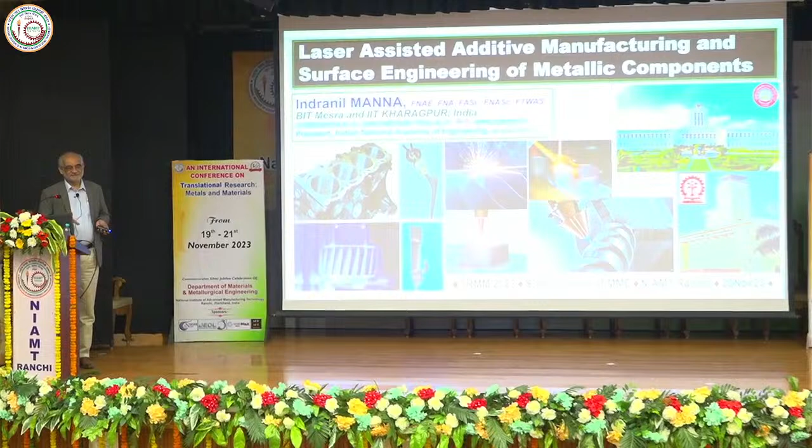Basically, I still wear two or three hats. One of them, of course, is IIT Kharagpur. I still continue my affiliation with IIT Kharagpur, and this is my 38th year. I'm not making a mistake. This is indeed my 38th year in continuation, even though I was in various places in between on leave. Even today, I'm on leave from IIT Kharagpur, and I happen to be heading the Birla Institute of Technology Mesra in the same city. I think most of the students would be able to recognize me.

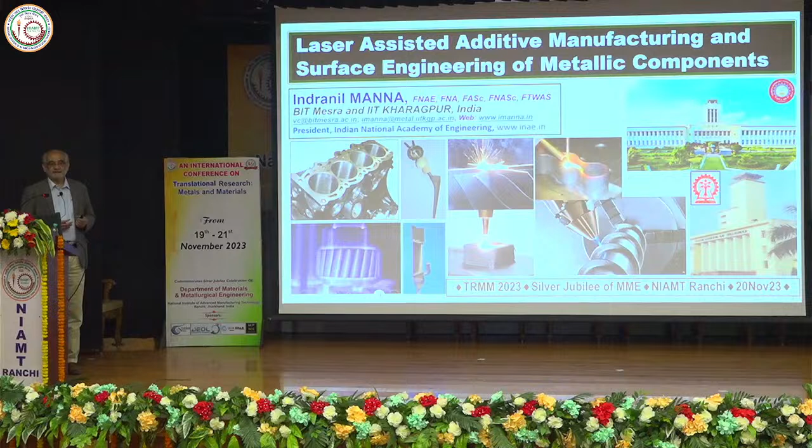And I would like to use this opportunity to talk about the current directions and certainly future possibilities in manufacturing. So plain and simple, the background: in the conventional way of manufacturing, one would expect large volume, large weight, huge floor area, big machines, a lot of manpower engaged in various intermediate steps. You first start with a semi, and you have multiple stages, and when you eventually produce the final 3-dimensional product with the desired specifications, you end up making so much material which is either waste or needs to be recycled.

If you do just the reverse, you start with raw materials and end up with the finished component to the exact specification, and yet produce practically no waste or excess material, that is what is called additive. So you can imagine from this schematic that to produce a finished component of a fixed dimension with a lot of scope for tailoring, if you can do that in one single shot, you obviously save time, money, space, manpower, with advantages which are impossible in the conventional way, which goes through various stages.

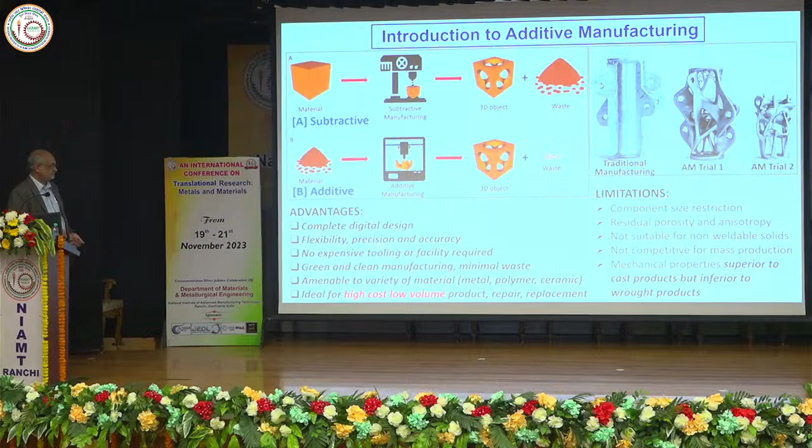So you can make the design entirely digitally. You have a lot more flexibility, precision, accuracy. You don't need all the expensive tooling or intermediate processing facilities.

Far more green and clean in terms of the overall approach. And you actually can literally use all possible engineering solids. You basically can start with a powder or a tape or a wire or a rod. It's not so much successful as yet with ceramics, particularly the oxide ceramics, but it started with polymers, and with metals now it's quite a reality.

The most important fact is mentioned here in red. Additive manufacturing can only compete with conventional manufacturing and score over conventional manufacturing when you're talking about high cost and low volume products. You can't really expect additive manufacturing to compete with a simple nail or a small component, to compete with conventional manufacturing in terms of products which are fairly cheap and very easy to produce.

There are disadvantages as well, and one has to be realistic. The disadvantages mainly come because of the possible defects that we may incur. The whole process is essentially a droplet integration process, whether it's a polymer or a metal. So when you fuse two droplets, and you have multiple of them joining one after another in series, there's every possibility that you also trap porosities, or during shrinkage you may be left with certain shrinkage cavities which may turn out to be internal cracks or defects. So that's one of the major concerns.

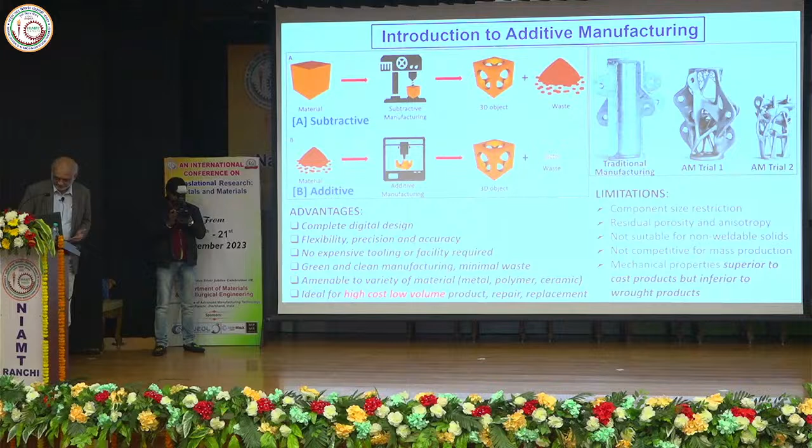So with this, I'll use this one. This is very important, borrowed from internet sources, many of you would have seen it, but two important points to mention here: if you look at the cost per component as a function of the degree of complexity and customization needed. Today you have, for example, 20 millimeter diameter and tomorrow you want 22 millimeter. Or you have a curvature of some few degrees and you want to increase or decrease the curvature. Or you want the sheet thickness to vary from X millimeter to 1.2X millimeter over a certain span.

So all these complexities and customization, if you wish to introduce them in conventional manufacturing, you have to change the mold, you have to change the die, you have to change various tools, and altogether quite a bit of changes would be necessary. In the case of additive manufacturing, the cost per component is independent of the customization or degree of complexity. The second important fact is that whether you produce 10 or 100 or 1,000 or a million, approximately the cost per component would be the same. So that's why you are seeing a horizontal line, a line which is flat.

And so you are seeing, I can't even roll the cursor. This is better? Okay, that's much better.

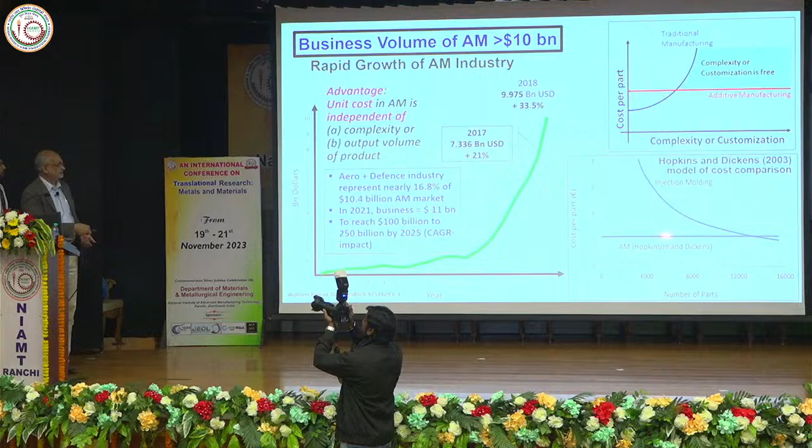So these are the two major advantages, right? And it is because of this reason, this is the growth curve in terms of volume of business done in billions of dollars over a period of time. And you see the history, though it starts from 93, a reasonable amount of work started happening only in this millennium. So I would say that history is about 20 or 30 years, and until about 10 or 15 years ago, the total volume of the business was hardly a couple of million dollars.

And today, this is old, 2018, five years hence we are already somewhere around 20, and the projection is that in just another 5 years it's going to cross $100 billion worldwide. So this exponential growth is enough for any manufacturer, any entrepreneur or investor to give it a serious look and explore whether we can make use of it. So those of you who are in NIAMT associated with manufacturing, I'm sure all of you would find it very interesting to realize that the future of manufacturing possibly will be in this.

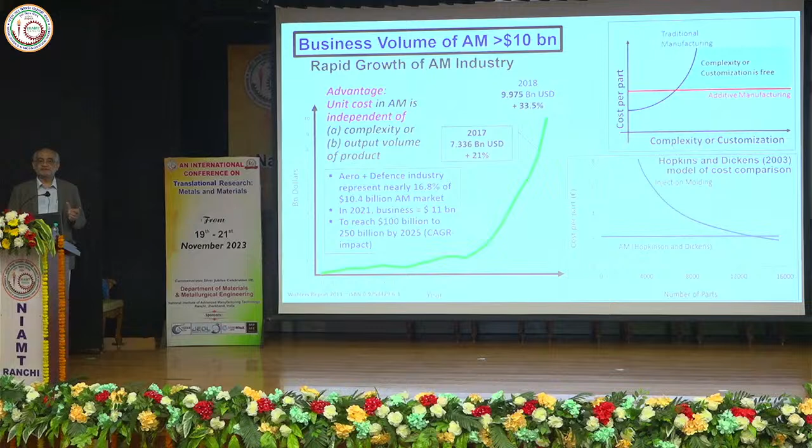And it's not just the savings accrued from raw material, it's about flexibility and unexplored possibility, which should be the main reason why additive manufacturing is going to be the future direction of manufacturing. So already there are examples like Daimler or BMW, even Airbus, all these big giants who produce millions of components, and for a single product like an aircraft will easily have a few tens of thousands of small components.

Now, if you have to maintain a warehouse for, let's say, just a passenger bus, the total number of spares that you need to have in the store would easily be a few tens of thousands. Huge space, huge logistic challenges, and if the bus fails in Ranchi and you have to bring it from Mumbai, then there's a lot of

time delay and transportation cost involved. Whereas if you have, let's say, 10 such additive manufacturing centers, the moment a component fails, the order is placed, you possibly can produce and see the replacement in a matter of hours, if not, it can be fairly quick, much quicker.

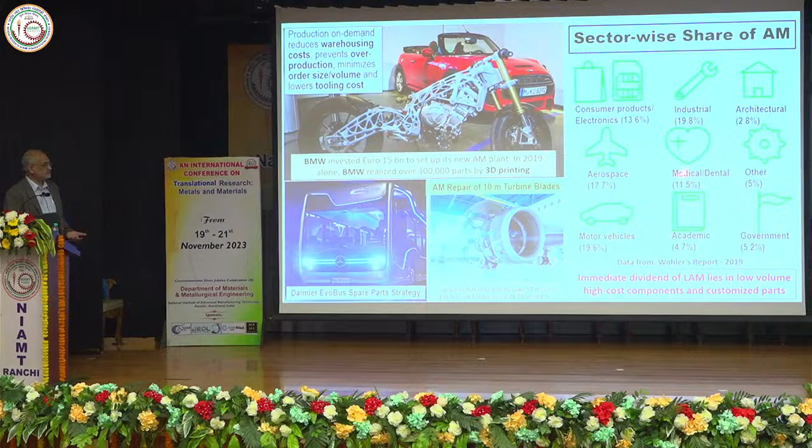If you look at the overall sector-wise share, then industrial production and manufacturing areas, aerospace industry, automobile, motor vehicle industry, account for nearly 60% of the total volume of business.

But what is coming up also is that conventional sectors which nobody ever believed would be useful for additive manufacturing, like the construction industry. Today, big buildings are actually constructed in a matter of days, certainly not months, let alone years, just because of precast structures which are produced on site and assembled.

Similarly, biomedical is another area where a lot of customized components are needed. For example, even if two persons are of the same height and the same weight, there's no necessity that the bones and various other anatomical structures will be exactly of the same dimension. So when a surgeon wants to replace or add on something, customization becomes a necessity, and that is fairly easy through the additive route rather than through the conventional route. So that's also one area where nobody would mind paying an extra amount of money when it concerns replacement of a heart valve or a very important joint and so on.

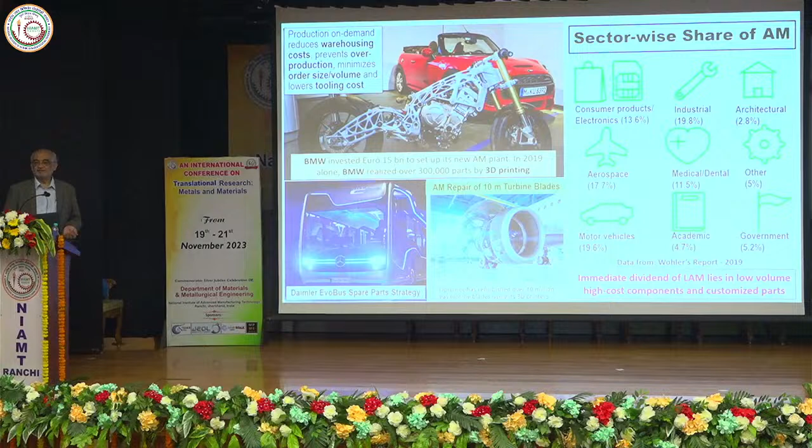There is no necessity that one has to do it purely with only one single tool, but the tool that I am personally devoted to is laser, and there's a very obvious reason as to why we consider laser to be a very important tool for additive manufacturing - it's coherent both spatially and temporally.

So there's no divergence, it runs in a straight line, you know exactly where you are going to make it hit and produce the heat, and also in the course of time, there is no variation if you can maintain the intensity constant. It's monochromatic, so you know exactly what the wavelength is. As a result, it's very easy to compute the amount of heat delivery at the given point of irradiation, area of irradiation.

I already mentioned low divergence, and this is what attracts the manufacturing industry the most - high power density. So literally anything from a very low melting thermoplastic polymer all the way to diamond or even tungsten or high melting solids, be it metals or ceramics, independent of the bonding characteristics, can be melted, evaporated, or fused.

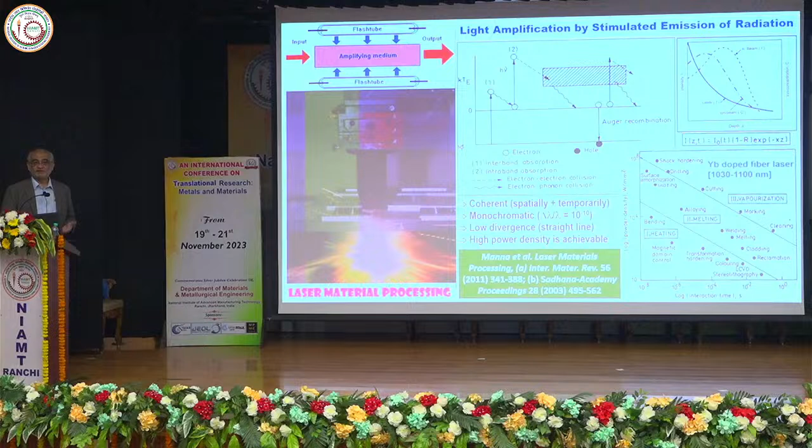In case of metal, I have an overlapping band, so essentially electrons are already available on the conduction band. I simply energize them. So in case of metal, the heating is faster, but at the same time, the reflection also is more. I have to know this basic physics so that I can deal with the solids and then impart exactly the amount of heat I want, to take it to the required state - solid state heating, or melting followed by solidification, or evaporation followed by deposition.

I'm sure as students of NIFFT you are all quite aware of these kinds of possibilities. So these are the conventional processes. I use the word equilibrium because the microstructural evolution in all these cases is time dependent. If you allow more time, you actually come closer to the equilibrium microstructure, be it melting, casting, heat treatment, sintering, rolling, or extrusion.

So in all these cases, we are talking about mass production. They are relatively slow, based on certain machine tools, and the microstructure or the outcome, the properties, are more or less predictable. I know what is, for example, the tensile strength, to what extent I can go. If I want to break away from that, and produce something which doesn't exist today...

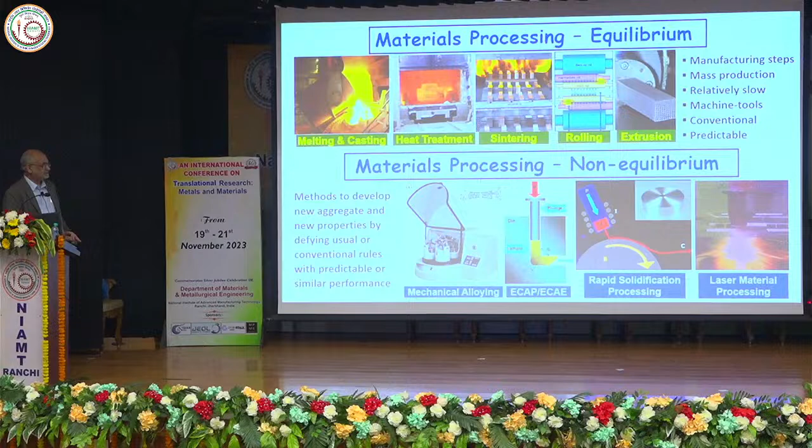...then I'll resort to so-called non-equilibrium processing. That means I'll break away from the Gibbs rule and try to enter into a regime where I can produce an aggregate which is not predicted by the phase diagrams. So in that case, I can resort to one of these techniques, and this is the technique we are concentrating on - laser material processing.

So while dealing with materials, I have a source of heating and I have material. As I said, I can have any of these three fundamental materials - polymers, metals, and ceramics. I can use any one of them, and imagine I'm using maybe not necessarily a single component, because you never use pure material for production - you always use alloys or various mixtures.

Then I'm bound by two constraints whenever talking about conventional processing. One is the thermodynamic constraint - if this is a binary diagram of A-B, I can pack only a maximum amount of B in A, and a maximum amount of A in B. This is the solubility limit. It's almost like call it God-gifted or nature-gifted - you can't defy it so long as you equilibrate at this temperature.

Also, you can't ignore the fact that if you have a liquid of any composition throughout, you can have 1% B in A or 99% B in A - nobody stops you, because in liquid you have complete solubility. But as soon as you cross this horizontal line, which is an invariant transformation line, there's no other way than to allow two solids forming simultaneously - you call it eutectic transformation. So these are the restrictions or ordains of nature which you cannot defy altogether.

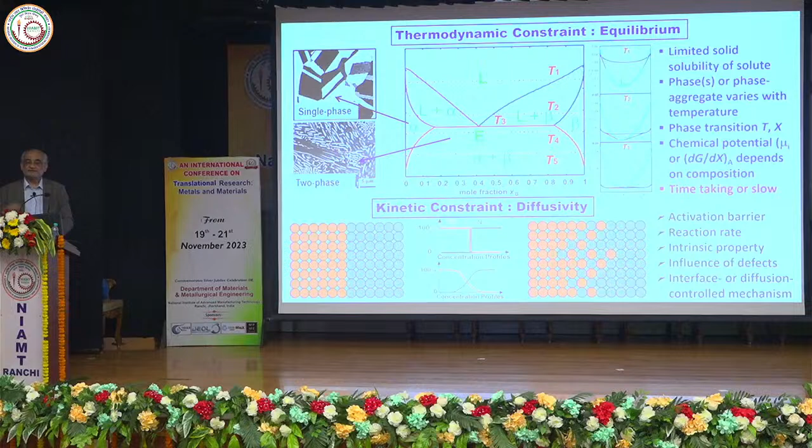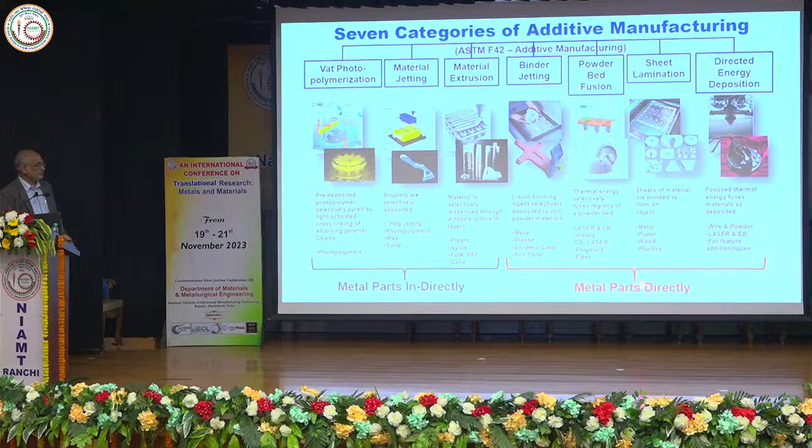But on the other hand, you can also do direct manufacturing of components using one of these techniques, shown on the right side of the view screen—from binder jetting to, I would rather say, powder bed fusion and so on. But let me simplify by saying that for the time being, if you're interested in metals, there are two ways to do additive manufacturing.

One is the so-called fusion bed, or fixed bed, or powder bed technique. So I have a bed of powder, and I have a source of heat—let's say that source is a very small line or spot. The moment it moves over or hits a point, it immediately melts and fuses, and then the beam moves. By the time the beam moves out, the previous point has already solidified. So I'll have droplets, or small fusion regions, moving linearly in one direction, then in the perpendicular direction, and when I complete the entire X and Y over a given area, I have a sheet. When I start building vertically, I have a three-dimensional component.

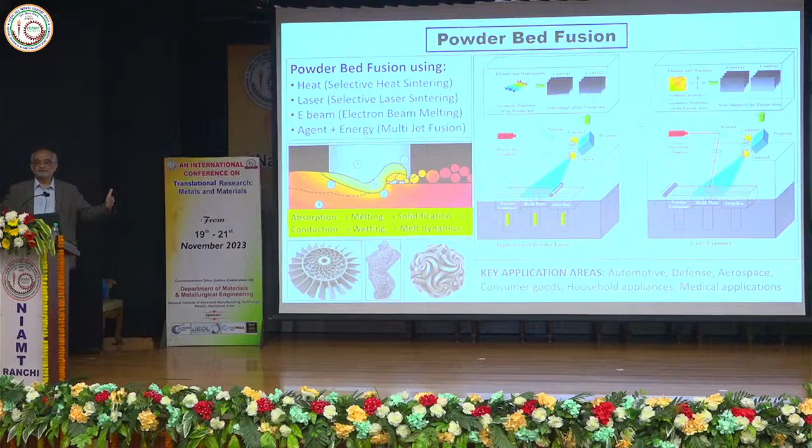That's the idea. The biggest disadvantage of this technique is—well, it's very good, and it's actually adopted and routinely practiced in industry for components where you don't want to change the composition. That means you know one gear very well, of a given dimension or changing dimension, but the composition is fixed. So you have a huge powder bed, and you use that tank of powder to manufacture the component.

But on the other hand, if you have the attitude of exploring something different and something new, you might like to change the composition, change the dimension, or vary things along the time you are feeding the powder. There I'll have a different configuration—instead of a tank of powder, I'll have a nozzle, which is essentially a coaxial nozzle.

Through this central region, the laser beam comes through, either fed by some reflection method or directly by a fiber, and these nozzles feed the powders directly into the spot. This is where the trick lies: I can have multiple feeder nozzles feeding not necessarily the same powder, but different powders. Even during feeding, I can keep changing the proportion of A, B, C, so I can vary the composition. Even in the simplest case, when feeding the same stainless steel from four different nozzles, I have to make sure the point where the powders converge coincides exactly with the laser spot—there should be total coincidence of the laser beam and the powder feeding point.

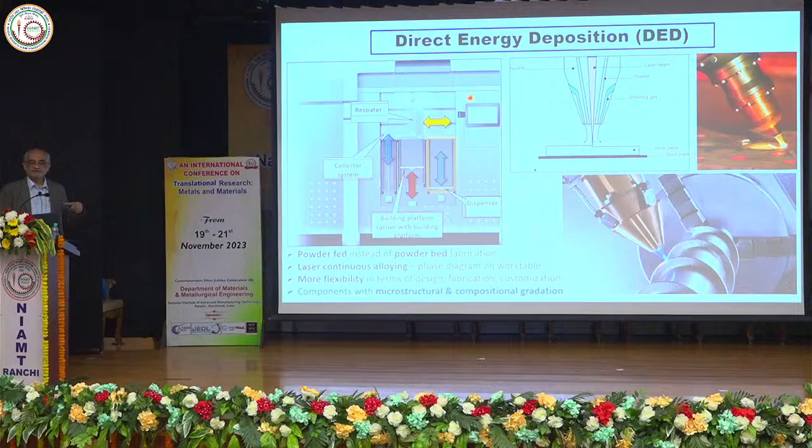So then I move along this line—by the time the beam has moved to this part, the previous part is already solid. I'll finish this part, then move one step ahead vertically, and keep moving along X, along Y, and then along Z. That's how I produce a three-dimensional component. It can be a simple block like this, a circular tube, an inclined tube, a nozzle with a conical shape, or a very complex design. Anything is possible. Here you have more flexibility in changing the composition or dimension than you have in the powder bed system.

And since I didn't have a lab of my own, that made me go all over the places, literally all over the places, every single country, and fairly renowned laboratories in Germany, England, in US. I would have had some collaboration and would have guided some projects as students together. But in 2018, I got a very large grant from DST, thanks to them, about 6.5 crore.

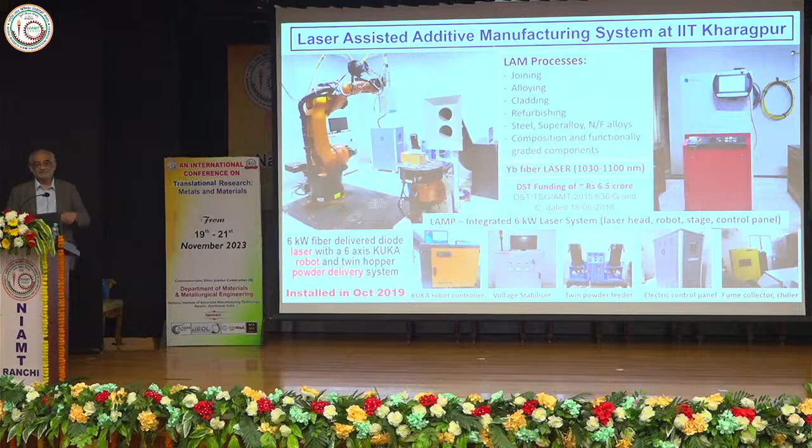So now on to some results.

Partha, you have to tell me about the time in case I overshoot. It's up to you. Okay, then I have the freedom. That's the advantage of having a director of the institute as a former student.

So this is the monster that all engineers would like to do something with someday, somewhere, so that one can claim that I have developed a turbine blade or a disc or something to do with a coating. One of the finest examples of engineering in my own understanding, because these blades are actually an 8 to 10 component system, single phase, and more than that, single crystal. Those who study metallurgy would know what a monstrous job that is, to retain all of them in single solid solution and develop only as a single crystal, one single orientation.

But they are exposed to 1050 or above temperature, so they are prone to high temperature oxidation, creep, and several other thermal fatigue damages. So there's always research happening to improve further, because if you can rotate at higher speed and withstand higher temperature, your thrust to fuel ratio increases, and instead of 10 hours, you can fly continuously for maybe 20 hours or so. So obviously that's a big difference.

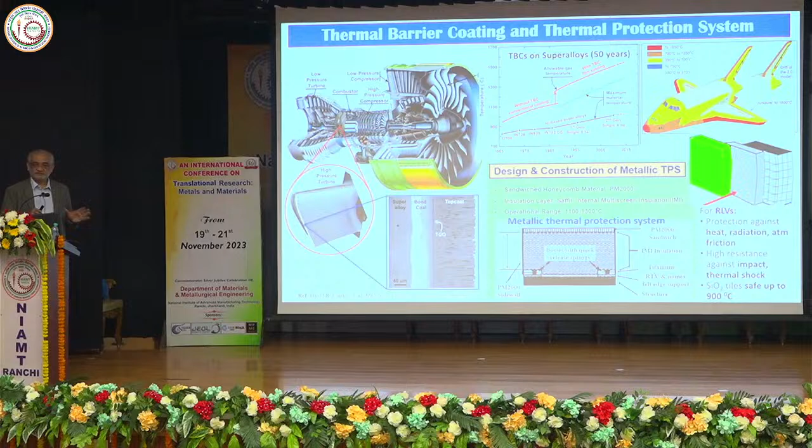So instead, if you can gradually build, so you have 100% metal, finally 100% ceramic, and in between you keep varying every 10%, every 20%, the coefficient of thermal expansion mismatch will be minimized, and as a result, you can get both. You can have a metallic structure for toughness and fabricability and thermal protection from the ceramic.

So one of my students, Manoj Kumar, we had funding from ISRO, and all he could develop so far was such a layered structure, varied structure. So this is completely ceramics. You do have porosities, but we don't mind having porosities because air is a poor conductor, so that also helps in reducing heat transmission across the cross section.

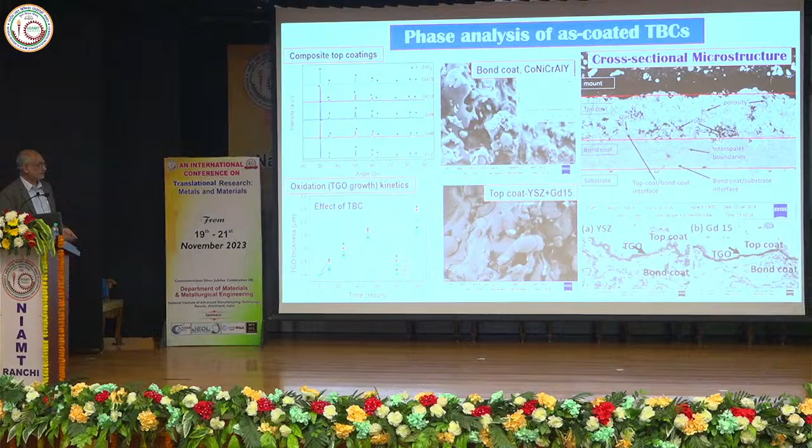This is how you actually measure the kinetics of the oxidation. Oxides won't oxidize, but at this interface you have the transversely growing oxides. So if you look at their growth rate, that gives you an idea as to which way the interlayer is oxidizing. So I'll skip those details, but now is actually the novelty that we wanted to propose. So this was done more than 20 years ago.

And this was one of the two PhDs of Jyotsna, who first showed that people always think of oxides as thermal protection. I think this was one of the first few examples where she showed that if you have intermetallic phases, if you look at this phase diagram, look at this Ti5Si3, 2130 degree congruent melting maximum. There's no fixed melting temperature because this is over a particular composition range, but this congruent melting maximum is 2130, but that's only the temperature.

The most important thing is that until room temperature, it's a single phase. So there is no phase transition. If you have anywhere else, there will be a phase transition, and hence there will be differential changes in volumes and expansion, contraction, and so on.

So what she did was to pick up a composition in the hypoeutectic zone, but because of faster cooling, these liquidus curves actually plunge, and as a result, she ended up getting a hypereutectic microstructure in a hypoeutectic composition because of non-equilibrium cooling. What is the advantage? The advantage is nearly 85% of this microstructure is covered by a phase which has a very high melting temperature, very low coefficient of thermal expansion, and most importantly is much stabler and more oxidation resistant than, leave alone metals, even many of the oxides.

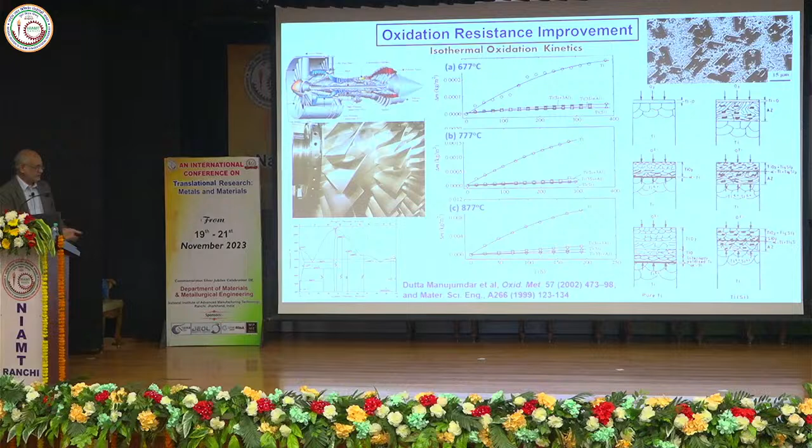So this was a very successful attempt, and learning from that, we propose that on superalloy 718, we can have silicon, aluminium, these kinds of elements. When they are alloyed, then I can have a graded microstructure which will be intermittently silicide or aluminide on the top, but at the bottom I can have superalloy.

So what I'm trying to say is that if you want to deposit or make a thermal barrier coating with zirconia or alumina or whatever, you first need a layer in between, like a NiCrAlY or any of those multi-component cobalt alloys, which will form a bond coating or bond layer between the base substrate and the top oxide layer. Here you don't need that.

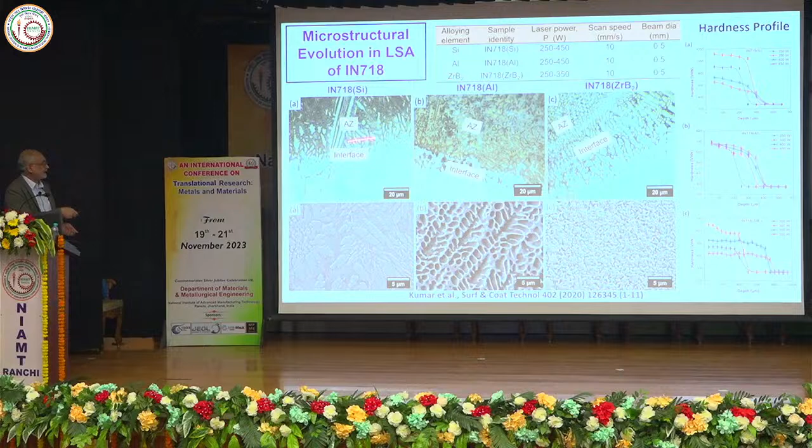Here you start with the superalloy, and then you gradually change the composition and end up getting a top layer which could be 80-90% of an intermetallic phase, not a monolithic coating, but dispersed phases, which is even better in terms of coherence. What is even more significant here is this interface. You see, this is completely superalloy, and this is where you're gradually changing. They grow epitaxially, near epitaxially, with a certain direction. And most important, there's no crack. There's absolutely no decohesion, because you're starting with a metal and gradually changing your composition and making it intermetallic.

So these are the descriptions of what is there at the interface, how they oxidize, and which way they are better. Just one graph here. This is base 718, and this is with one of these coatings. So obviously the mass gain per unit time is much lower. That means the oxidation kinetics is retarded significantly.

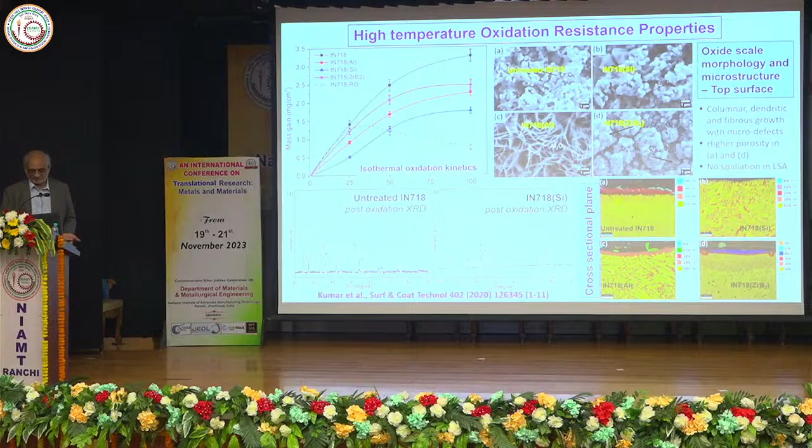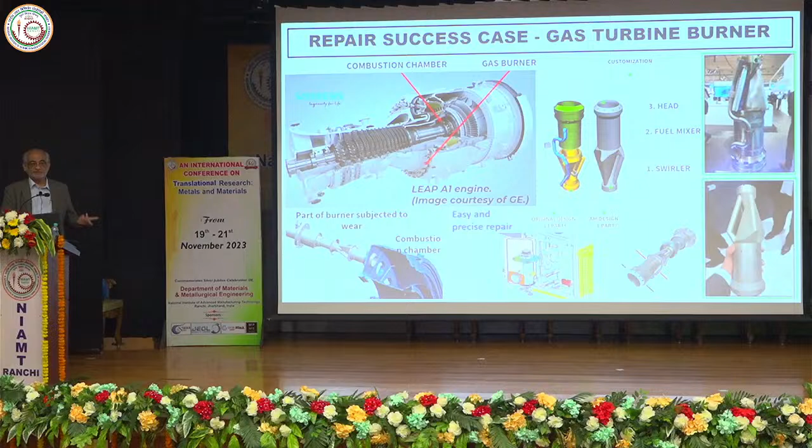Similarly, very important components like this. So here also, at this nozzle, the very design of the nozzle, if it is assembled, there are 13 different parts put into a single nozzle assembly. If you can design the same thing by additive manufacturing, then it's a single component, single part, in one single manufacturing operation. So you can very well imagine how advantageous and attractive that is.

So in order to do this, of course, I do not have the capability of attempting to create a nozzle, but I'm going to show now 4 examples from 4 of the students. All are from Pune, all of them work for Hoganas, and all of them are interested in developing components by additive manufacturing, either for refurbishing or for direct manufacturing.

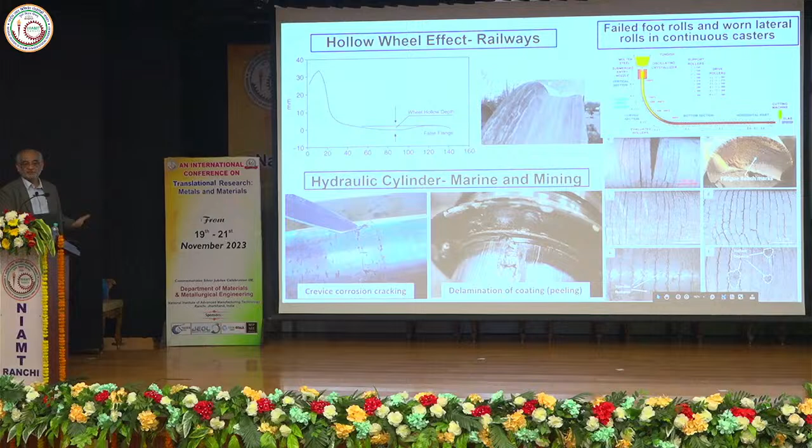So Nikita wants to basically come up with cladding or coating and eventually a complete roll by which she can replace some of these worn out ones, either refurbish them or develop graded rolls of various diameters. And she basically, okay, no, I haven't come to that as yet.

So before that, this was another student. He's now not a full big shot, but half big shot in ARCI Hyderabad, leading the CLP and the laser unit there. And he was one of the first few to show something very interesting metallurgically. So he deposited H13, one of the standard grades of tool steel, on H13.

Now normally in H13 rolls or buckets or something, you would use a stellite coating, cobalt tungsten carbide combination. So obviously 2 different compositions, the interface is suspect, and most importantly, the temperatures are different, as a result of which you refurbish, but that repaired component also doesn't last too long.

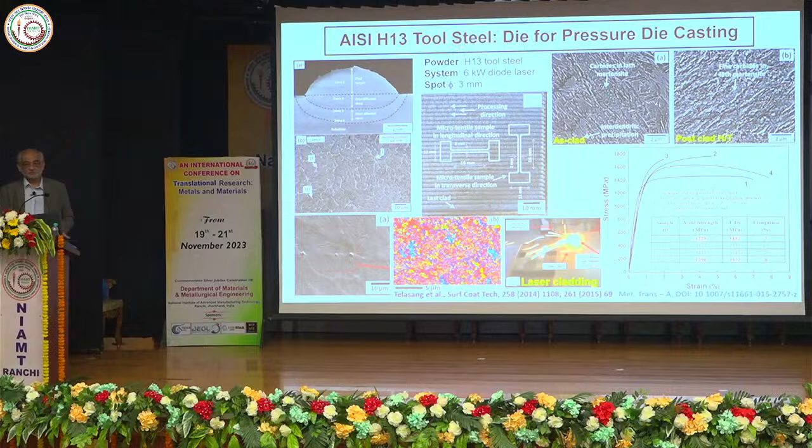So the martensitic needles are actually very fine, but confined within the prior austenitic grains, and because of the fine platelet size, not only does the strength increase, with little retained austenite in between, his overall fabricability range also improves. So it turns out that actually the top layer mechanically is even better than the virgin roll. So this gives a very interesting, exciting possibility.

So then, borrowing from this, we said, why not take stainless steel and end up with a superalloy? Not necessarily a turbine blade, but there are many components, let's say a heat exchanger. So if I have a stainless steel tube, and then I make a clad with superalloy with a sharp interface, stainless steel to superalloy, the interface is amenable to cracking because of compositional mismatch.

How about doing it in some graded composition, 25%, 50%, 75%, and then I have complete superalloy. Okay, so that's the idea, and this is in progress. We certainly see that cladding is easy. Apart from porosity, there are no quench cracks.

These are the phase aggregates. We tend to avoid intermetallic phases in large volume fraction, but not altogether. So there are niobides formed, and that's a matter of worry: if you have too high a volume fraction of these niobides, or maybe even some Laves phases, then this could lead to brittleness, which we have to avoid.

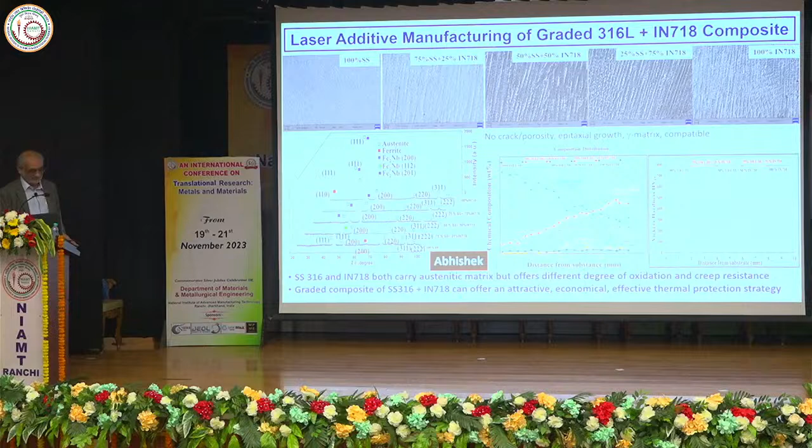So this is what Abhishek wants to do and is doing that. The next one is just an anecdotal observation. Forget about all these parts. Sandblasting, belt grinding. You know very well that metals actually reflect more than 90% of the laser incident light because of the free electron cloud available on the surface. That's not good news because you are giving, let's say, a few kilowatts, but only 10% of that can get coupled with the stock, which is all wastage. So you would like to improve the absorptivity of the laser.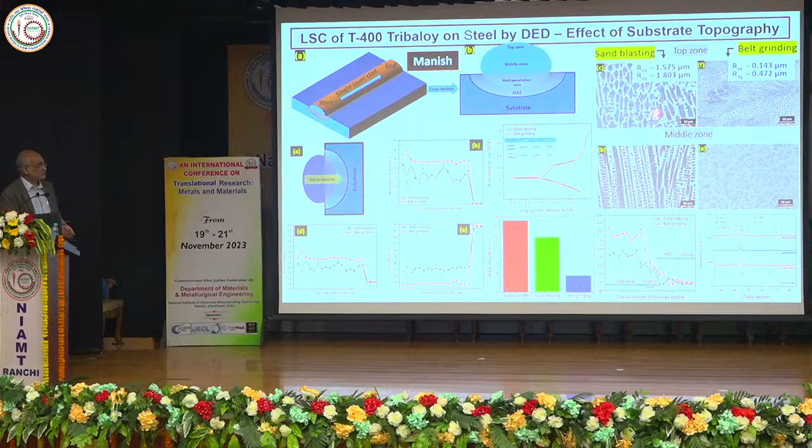The standard industrial way is surface roughening. So you do it by sandblasting, and accidentally we said, why don't we also try with belt grinding? And now whether it is sandblasting or belt grinding, a blind man can see the difference in the microstructure. So just because the surface preparation method adopted was different, the entire microstructure could also be so much different. So that taught us one lesson, that we all tend to worry only about the laser, the power density, the speed, the composition of the powder, ignoring altogether the surface condition of the stock on which we are cladding or depositing. So that also has a very large bearing.

So this is a similar exercise with pure stainless steel. Just to tell you this part, these are orientation imaging maps. So you're seeing that from the top surface you see large areas, but these color codes are only to give you an impression that if you look at the length scale, you're talking about almost a few tens of micrometers of areas with no grain boundary in between. Or even if there's a boundary, that boundary is almost negligible or can be ignored. The reason is the mismatch is so little. So in other words, laser gives us an example. So this is the top surface. When you look from the bottom, then you see directional growth.

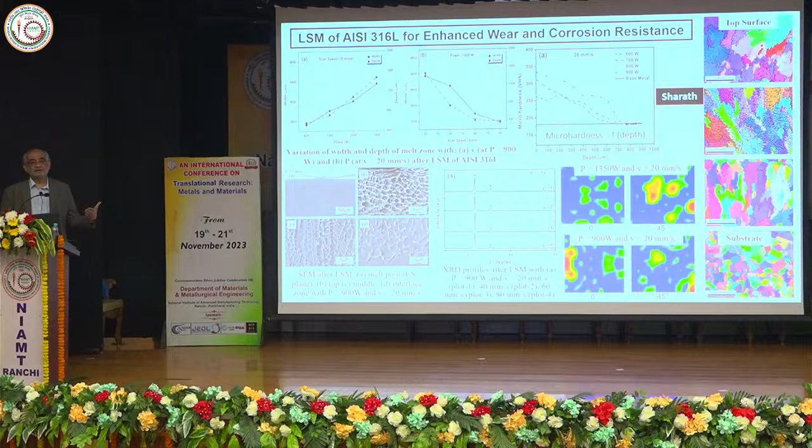Okay, but when they grow onto the top surface, they're not immediately providing you high angle boundaries with large mismatch, which is good news because if there's a large mismatch, then there's also a large difference in electrochemical potential. Stainless steel is meant for corrosion resistance. So if you create a top surface where the boundaries are less than a degree or just about a degree, then formation of galvanic cells is minimized. So the corrosion damage also will be minimized.

So this is what I was trying to refer to earlier on with Nikita's work. These caster rolls, she wants to try with these compositions. I'll just fast track it. She's trying to understand how the microstructure develops along the thickness. So this is A, the top layer. So this is one of these alloys. In fact, this is a martensitic brand from the Höganäs group. This is high nickel, so this is austenitic, and this is also a semi-martensitic variety. So she wants to try with different ones.

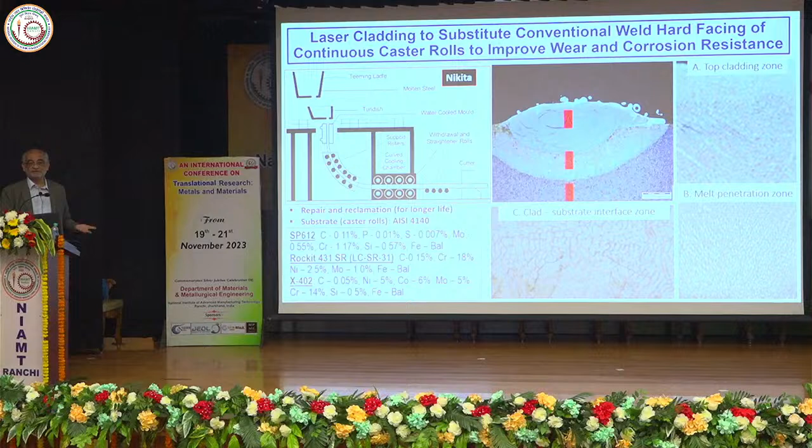The base substrate is 4140, low alloy steel. So imagine if, instead of a high alloy steel, you can change all these casters to low alloy steel and then clad it with one of these clads, and still retain or even offer better corrosion resistance, better high temperature resistance, then the company stands to gain a lot. So that's the idea.

Similar efforts are done by Mangesh, and he wants to take care of wheels, the railway wheels and pulley wheels and so on, where cracks and erosion or wear on the surface are very common, and he wants to prevent that by having a harder coating. So this is just a signature in terms of hardness variation, and one can make it sharp, or one can also make it shallow, graded.

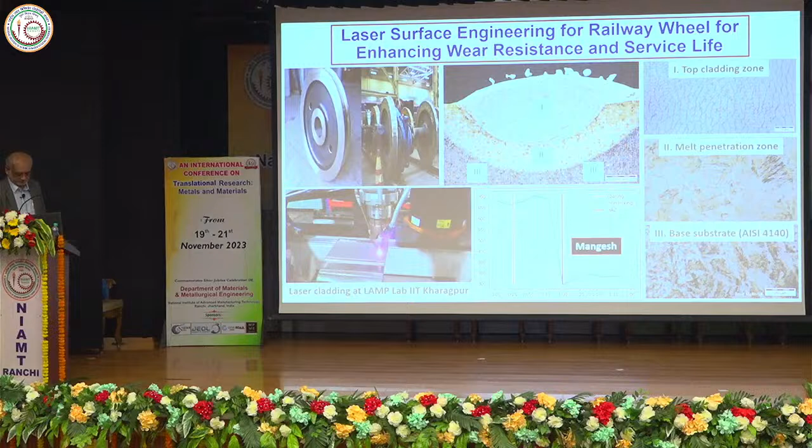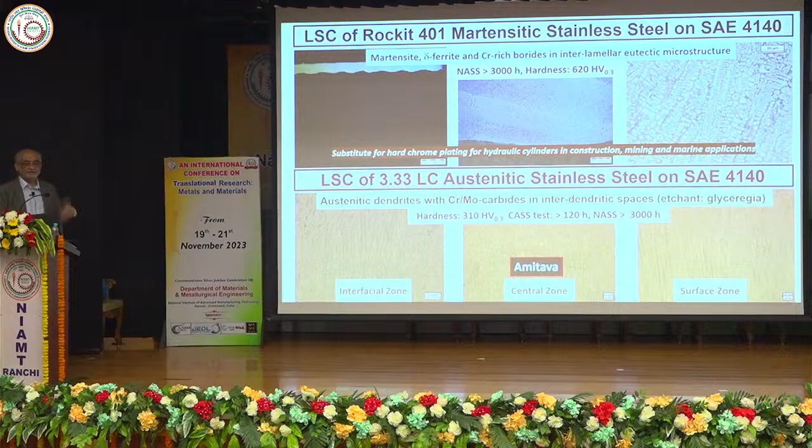This is what Amitava Roy is trying to do, and his work is related, again, to two varieties, austenitic and martensitic. He wants to develop austenitic dendrites with carbides in between, in the interdendritic spaces. So essentially use 4140 as a base and develop either a martensitic or austenitic variety on the surface, so that they can be used in conditions where the threats from wear and erosion are much larger.

And then finally, for earth moving equipment, Shubhranshu wants to develop a similar thing, but this is new: he wants to not only use one of these high alloy steel clads, but also disperse tungsten carbide into them. Now this is different from the stellite kind of cobalt-based tungsten carbide dispersion in terms of coherence or compatibility. And you have very nice spherical objects.

So this sphericity also tells us that there is very little dissolution during the process itself. So they remain solid particles and they can be dispersed. The advantage here is that if you want to disperse tungsten carbide in normal metallic systems, there will be a lot of gravity segregation. With these thin clads, you can actually maintain very good uniform distribution.

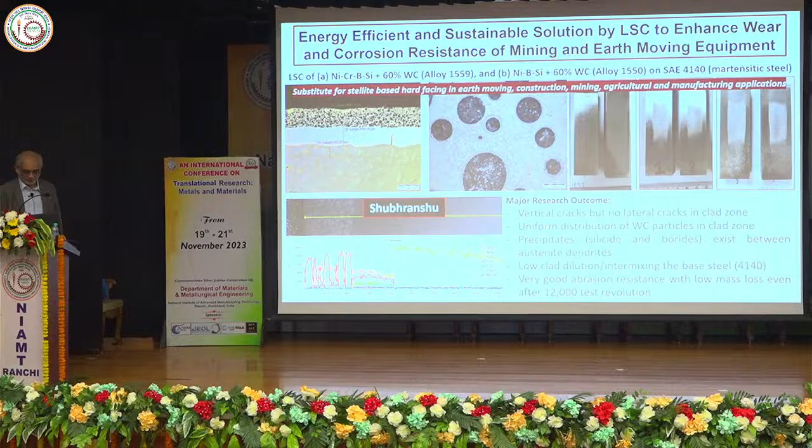So this is the last example I want to share. Essentially, Shubhra Kamal wants to develop these three-dimensional components using T800. This is again a trade name of this same Laves phase dispersed high temperature clads. And so he's trying to build large thickness and large height components and then look at their variations.

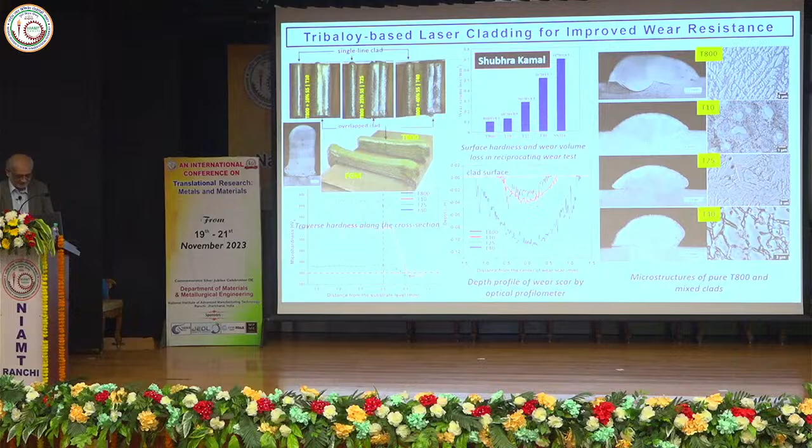So in order to do that, he's again using compositional gradation. So 30, 25, 10 means different levels of dilution, and this is as-received T800. So he's mixing T800 with stainless steel and forming different clads. The interesting part here is, if you look at these blue ones and the red ones, the red lines show the wear resistance and the blue lines show the hardness. So you can very well imagine that the harder the surface, the degree of wearing is minimal.

So obviously when you have pure stainless steel, like here, you have fairly high wear volume, the red line, because the surface hardness is small. But of course, please remember that hardness is not one and the same as wear resistance. But nevertheless, Archard's law tells us there is a direct correlation. So what he is trying to show is that if I can grade appropriately, then I can change the hardness and the wear resistance accordingly.

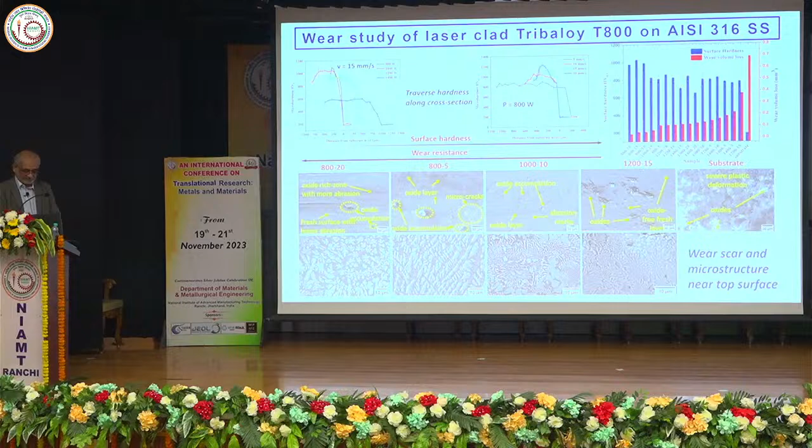And in order to do that, you develop such various types of microstructure. You can very well see that the nature of the microstructure is different, the constituents are different. And so one actually can do a complete mapping. We know solidification behavior in large volume is primarily controlled by two independent parameters, the thermal gradient and the growth rate. So if I plot them, even in laser processing, which is a small volume and a very transient phenomenon, one can show such microstructural mapping.

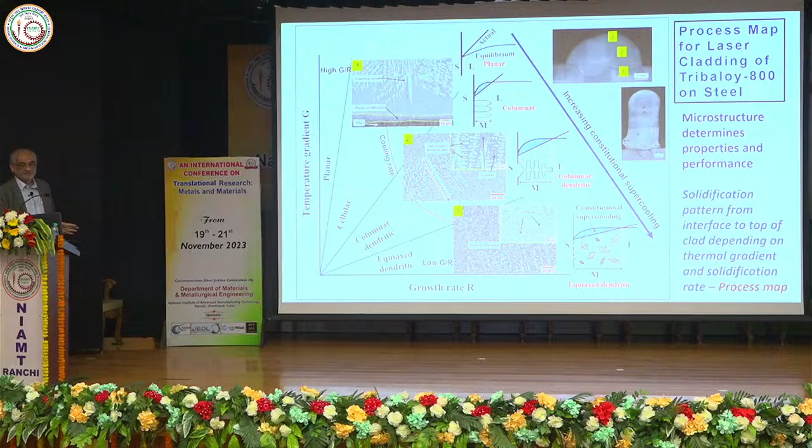When you have very high temperature gradient and so very high G over R ratio, then you end up getting such directional structures. Whereas when you have very low G by R ratio, you can gradually change from columnar all the way to equiaxed regions. So that means this microstructural control is also possible.

So I think now I can wind up and make certain important statements. I firmly believe that additive manufacturing, particularly with the fusion method, say with laser, is a droplet integration process. You can produce one, two, or three-dimensional components. You can produce a wire, rod, a sheet, or a three-dimensional component. There's a huge growth potential, which we are appreciating gradually, and the field is far from being saturated.

There's enough good news for the PhD students. You can do a lot of very exciting work and produce good papers. There's a lot of metallurgical aspects to be understood. For any conventional component, we have several decades, if not a century, of documentation. I know exactly what is the creep level, fatigue level, strength level, and how it would behave under these conditions.

Additive manufacturing components are just hitting the market, so we don't really know how they will behave after 5 or 10 years. So there's a lot of modeling and experimental work to be done, for example in terms of fatigue, creep, reliability, failure modes, and so on. So we need a lot of good manpower, and the PhD students can do wonders there. I personally see huge opportunity; a lot of hurdles exist which we have to understand, and for that we need a very serious effort.

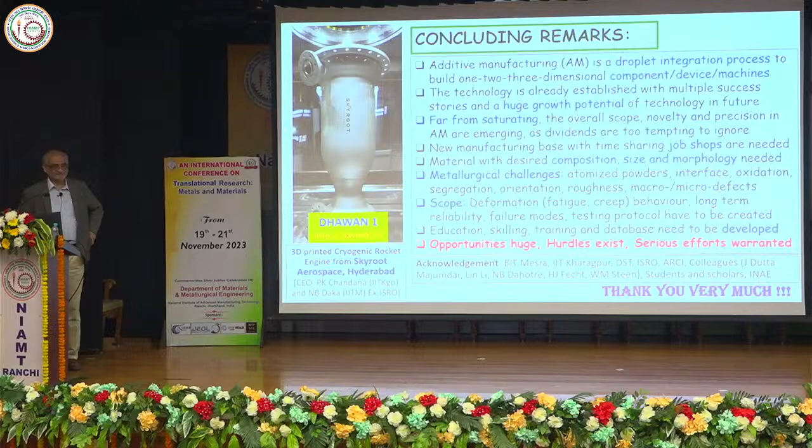Is there any question from anyone? Yes, Prof. Thank you, I learned a lot.

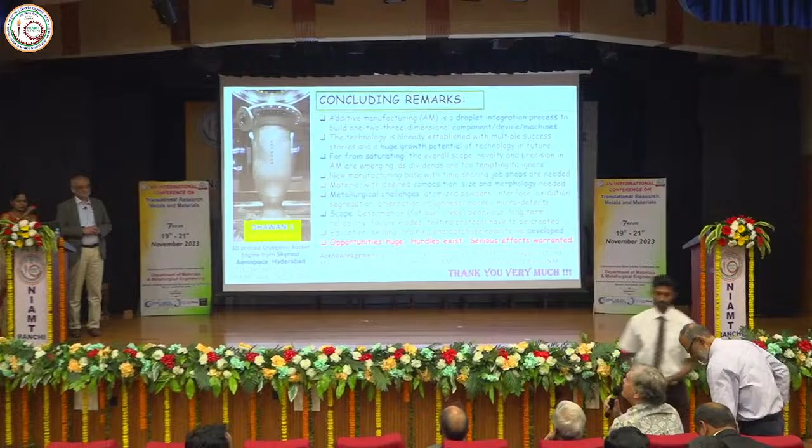I was curious about one plot where you showed the cost per AM part staying horizontal. But how is that possible? Because it takes more time or more machines? No, this is the advantage.

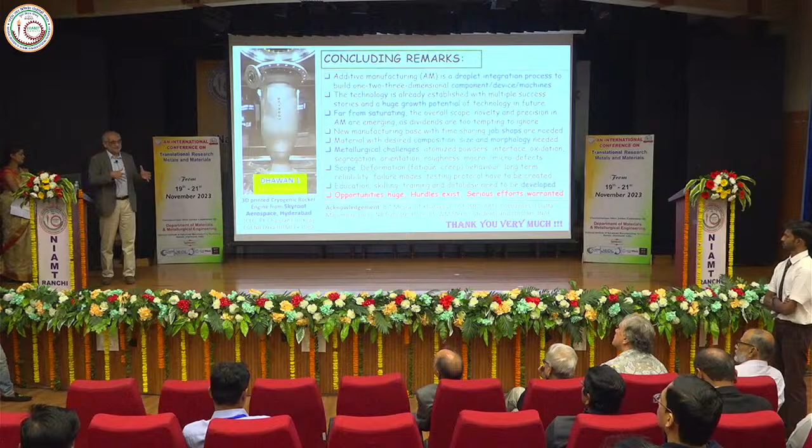Your design philosophy, whatever you develop in your CAD file, all flexibilities you can do in your CAD file. So today you have a dimension, let's say XYZ. Tomorrow you want X, 0.9X, 1.1Y or something like that. Your design board develops that and trains the laser beam to move exactly to that direction. So if I move from one design to another, in case of conventional processes, you need to change the die, you need to change the various other things needed. But if you make the same part, I thought this was about the same part.

Oh, if you make the same part, then conventional manufacturing is profitable if you produce more than a certain number. Yeah, exactly. So in fact, that's what I showed. If I may just quickly go to that.

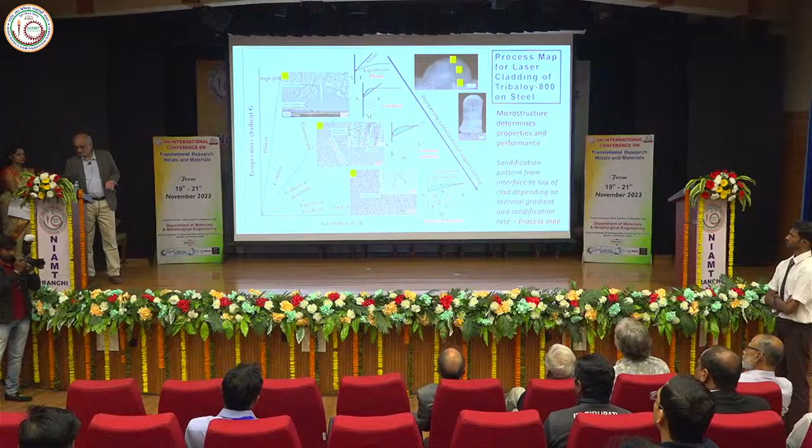Otherwise, your additive manufacturing - if you produce, for example, one heart valve, or one femur joint, or one gear of a very specific design - for conventional manufacturing, that's a very huge investment. For additive manufacturing, it's no cost at all. That's the advantage. Similarly, if you now do the tailorability, like I was saying, that you want to adapt to a particular design, change according to thickness, along the thickness or the dimension, it's a lot easier here.

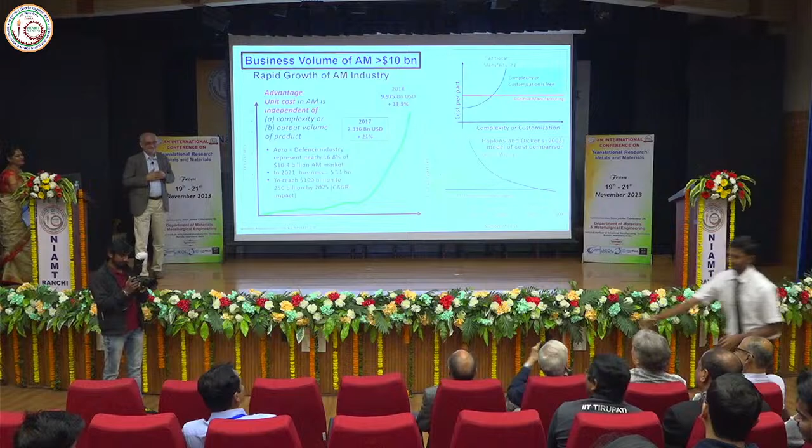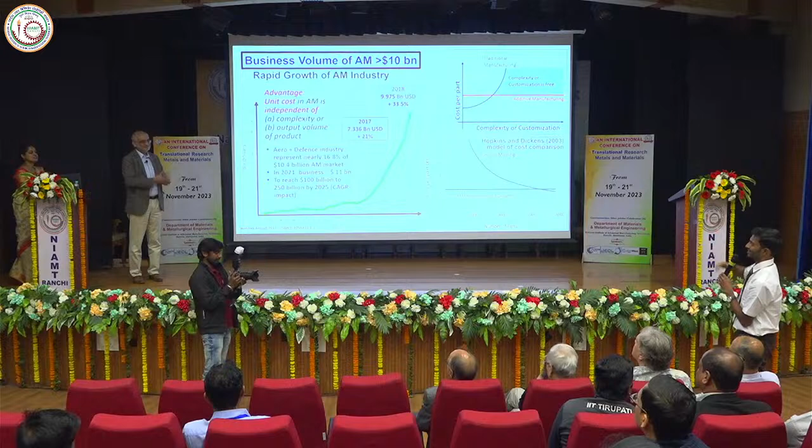Sir, I have a doubt. Sir, in Inconel 718, IN 718, which we use for the space researchers, mostly the superalloys - so you have made a layer of silicon or aluminum, the silicon layer. What kind of bond does it make with the austenitic alloy? Because the austenitic alloy which we are using will withstand till 1200 or 1300 temperature. It's an FCC, whereas the other one is diamond cubic. So how do they talk to each other? That's yes, the question, yeah.

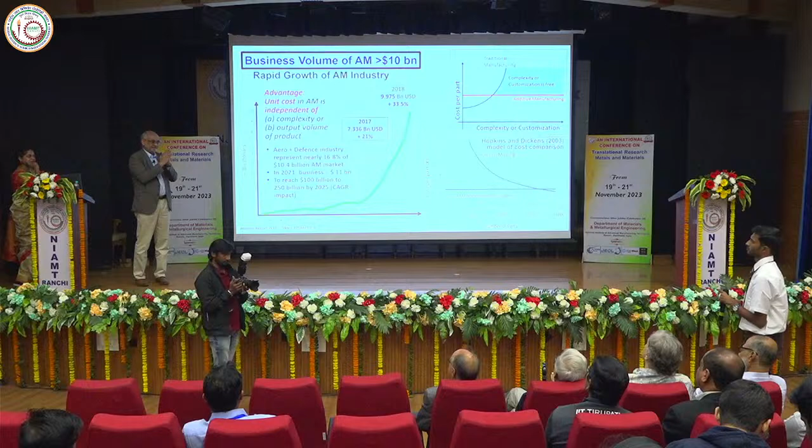So the trick is, I said silicon added, I didn't say silicon clad. So I'm adding some percentage of silicon so that I'm following a phase diagram and then stopping somewhere. And by stopping, what I mean is that it will give me the desired volume fraction of that silicide phase which I want. So I have to select my parameters such that my composition will give me exactly X volume percent of silicides dispersed in the austenitic matrix, which is IN 718.

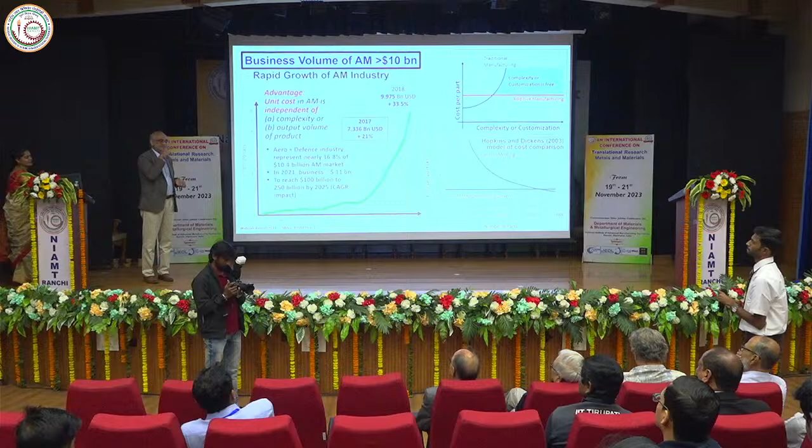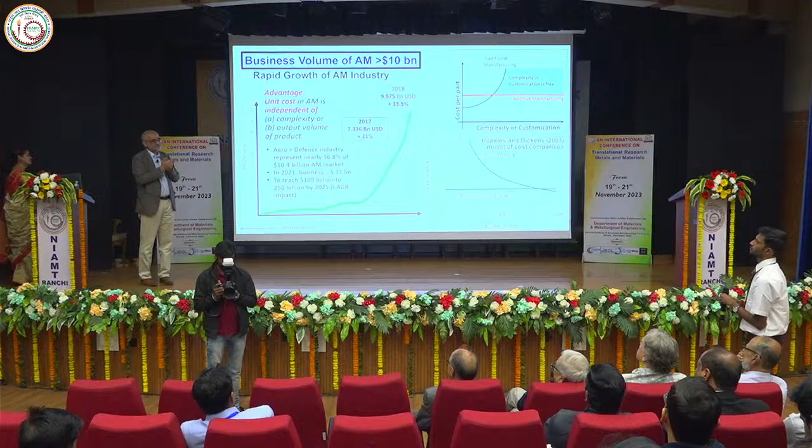But I wouldn't do that often with superalloy, because the advantage of superalloy is elsewhere - its own creep properties, right? So this is only when I'm interested in improving the oxidation resistance. By the way, that example I showed was on titanium, not on superalloy.

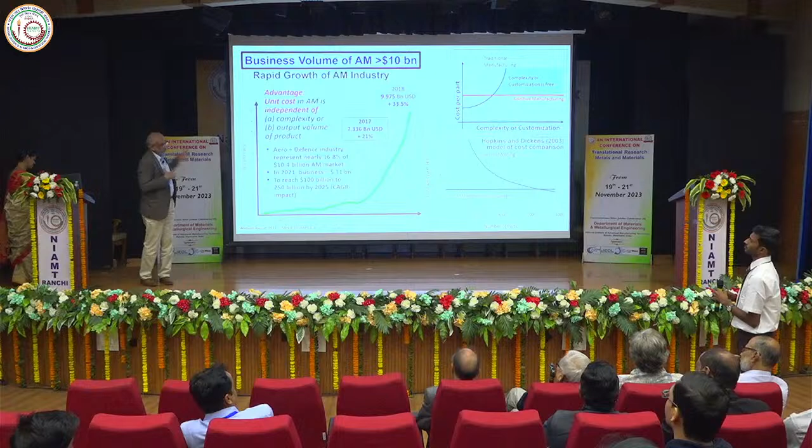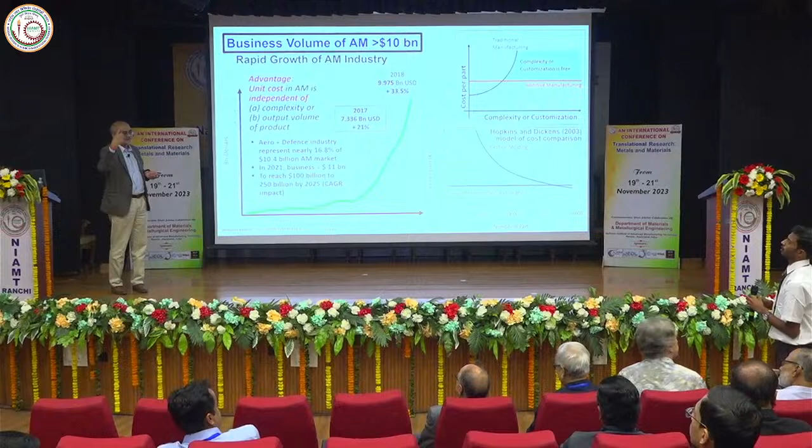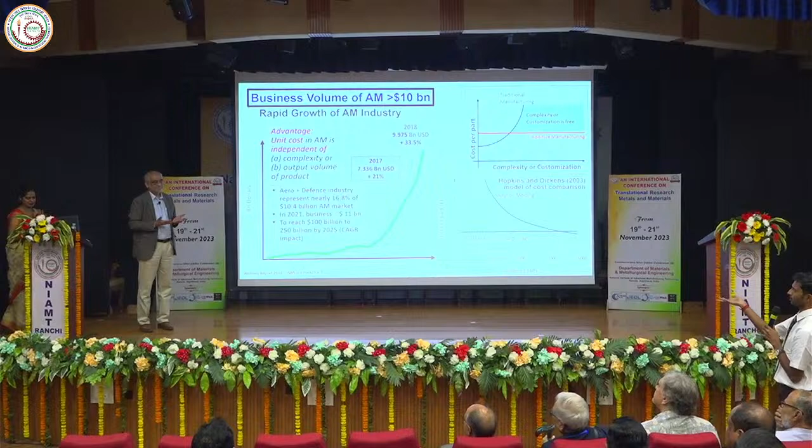So on the titanium alloy, which is in not the combustion but the compressor part, there you reach let's say 500, not even 350, 400 degrees centigrade. So if I can push more air, the frictional forces will be larger, frictional heat generation will be larger. So I need a thin layer of silicides there, which can take me to 650 degrees centigrade. So it's only a thin layer where I have silicides dispersed, not a monolithic layer - because titanium alloys, basically Ti 31 or titanium alloys, cannot withstand more than 500. I mean, typically in the compressor part, the highest temperature is about 350 to 400 degrees centigrade.

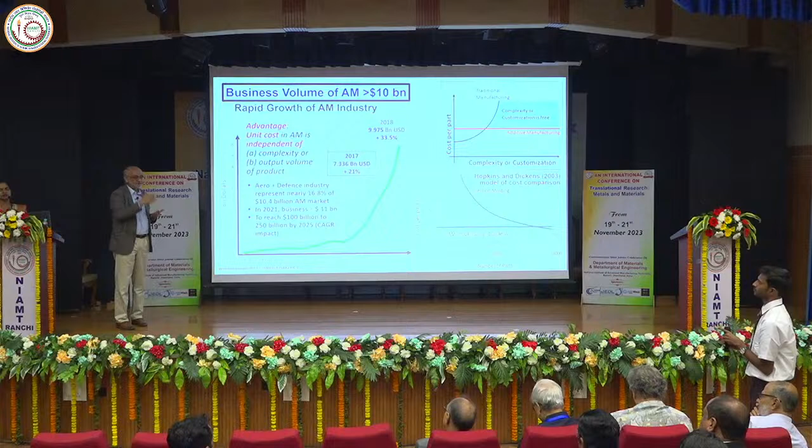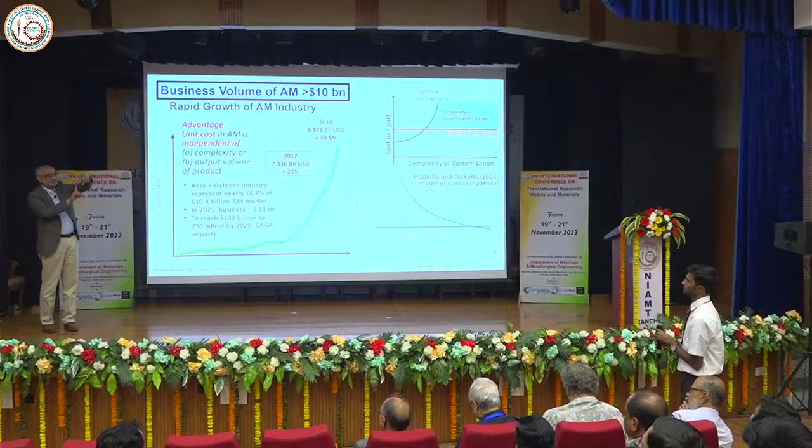That was to demonstrate that with the same alloy base substrate, I can improve the oxidation resistance, meaning it can withstand without melting. Basically it's oxidation - titanium has high affinity for oxygen. So to prevent that, you create a barrier layer. For oxidation, remember cations have to go up and anions have to come down. So in between, you create a barrier layer with this silicide, so they don't talk to each other, and oxidation stops.

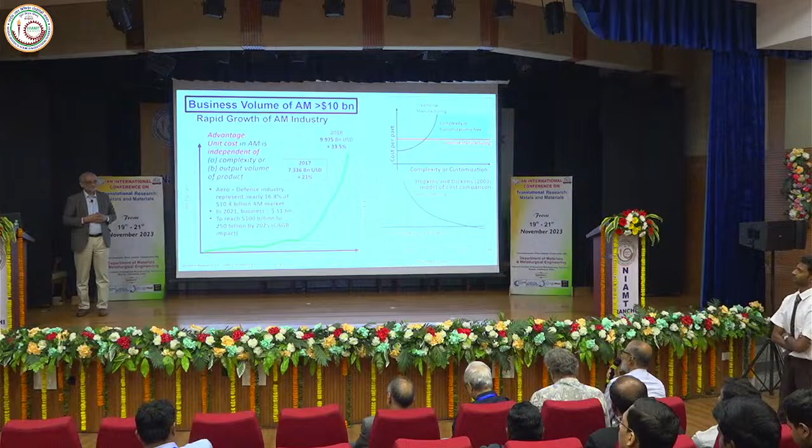I have a question. One observation in this area is that more than 90% of patents in additive manufacturing are owned by corporations or industries, and almost 100% of publications are from academics and laboratories. So this compartmentalization - how do you look at it?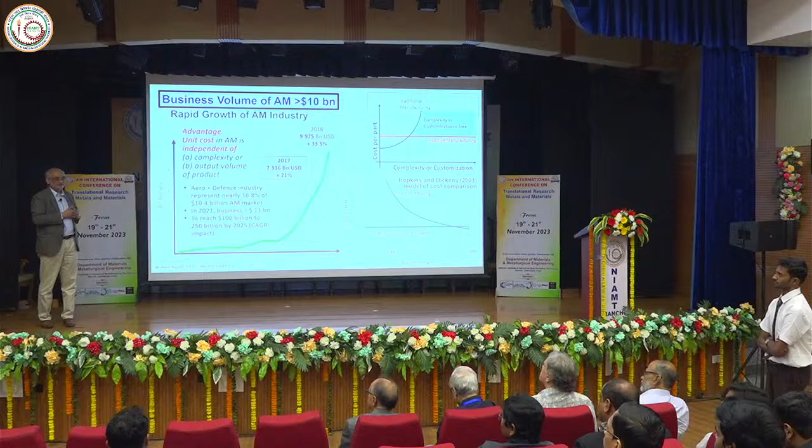No, it's not true, particularly in countries like US and France. There, patents are filed by both people from academia and industry. Similarly, many spun-off companies are actually spun off from big national labs in the US - many of them, at least in USA this is the trend. In India it's happening too, like Skyroot is one example. There are others, maybe Naga can know a little more. There's always a wish for more, but that's not fully happening - there's a gap. Thank you.

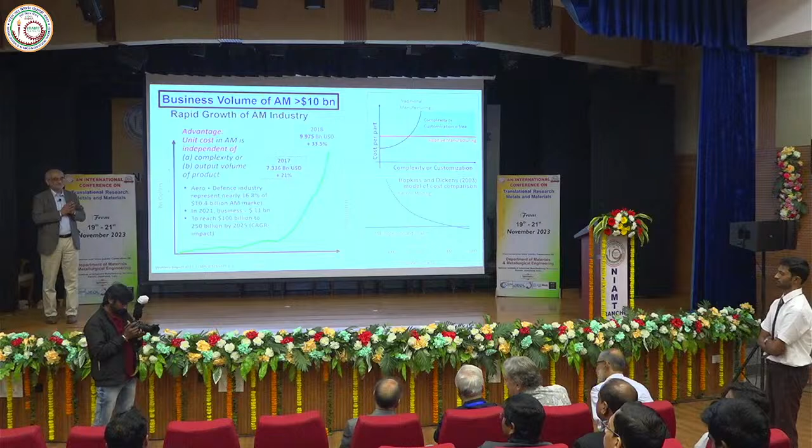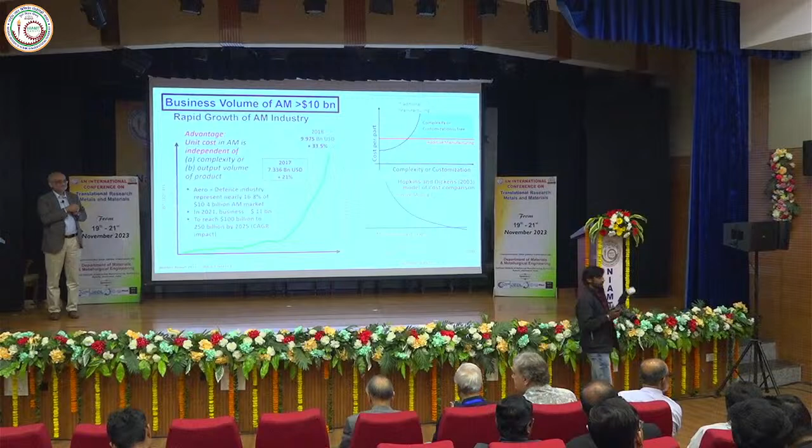He had a question. Sir, thank you for a very nice presentation. Sir, I seek some information.

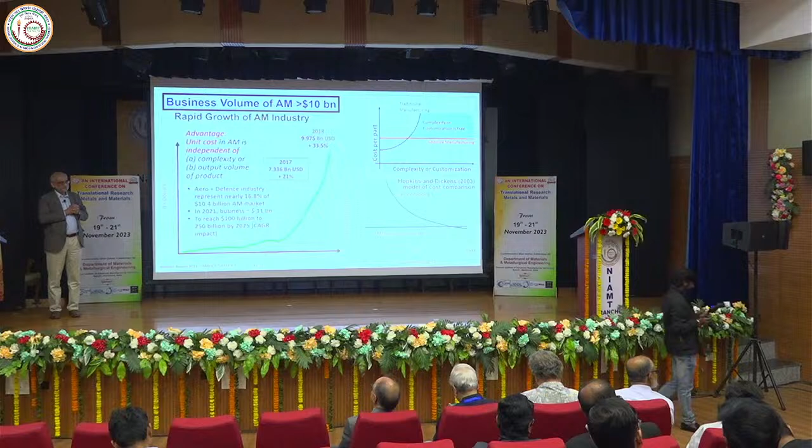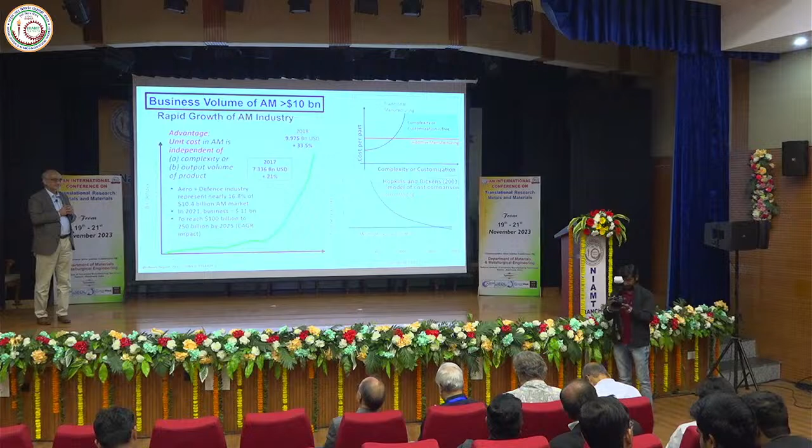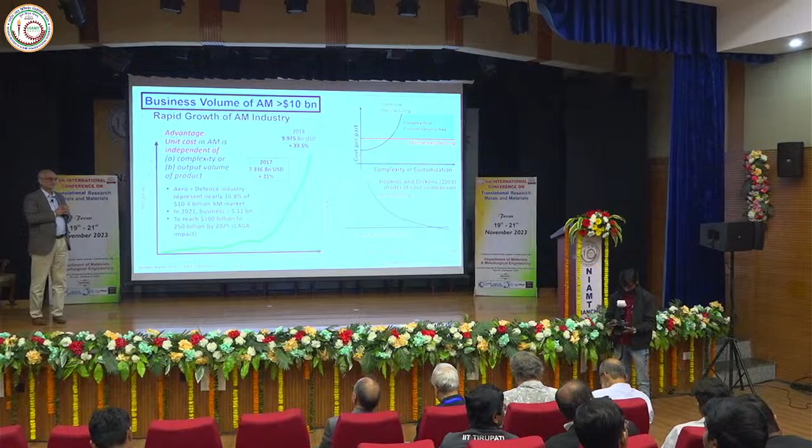You were talking regarding turbines and these things. I have a specific application - turbocharger, used in ships, aeroplanes, and railways. Because it's working in very different conditions, it is corroding and failing frequently due to that. So is there any method to improve the surface properties or something like that?

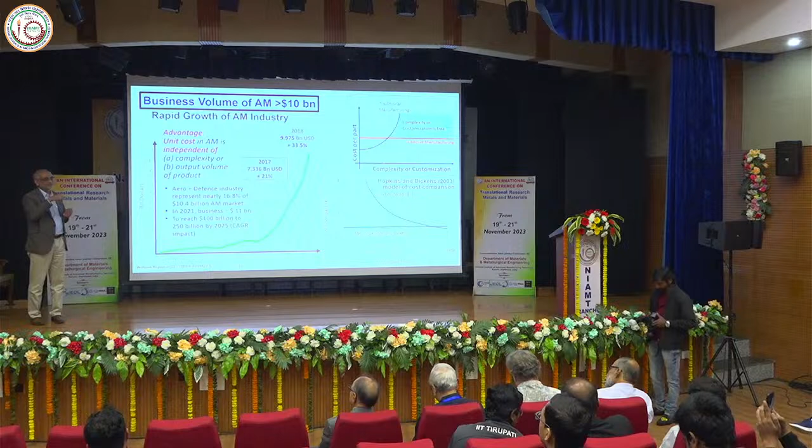I would first ask, what's the section thickness of your impellers? That will vary from place to place depending on the application. If it's over a millimeter, this kind of cladding method can very well be applied. If it's less than a millimeter, then during processing we may end up damaging more than creating a new layer. So if it's a few millimeters, we can always have a very thin layer.

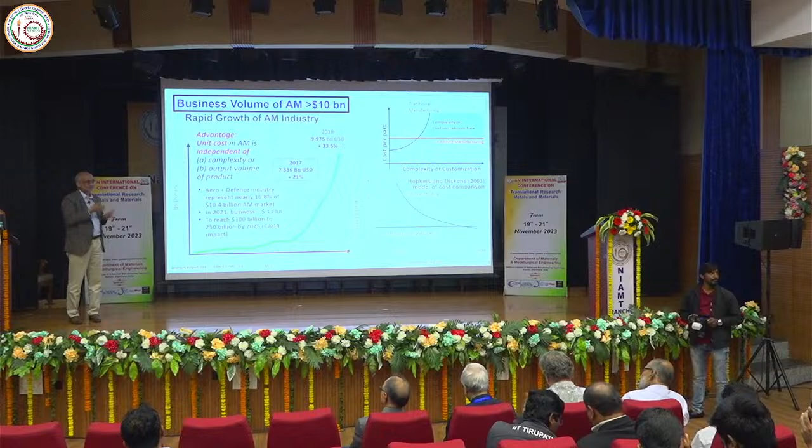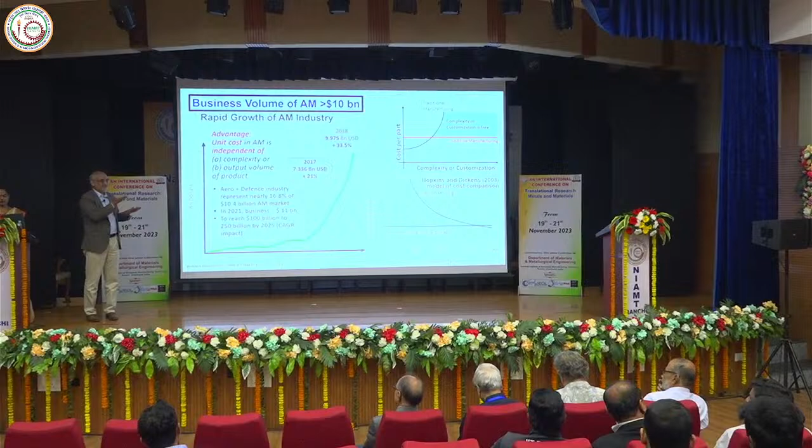Your problem in a turbocharger would be coming from erosion, high temperature oxidation, and corrosion - both. So I have to create a barrier layer. On a millimeter section, I can think of creating a few tens of micrometers layer to prevent this. If you can give me some coupons, flat coupons, I may not do it for a full charger, but I can always try them. Yes sir, I'll try my best. Thank you, sir.

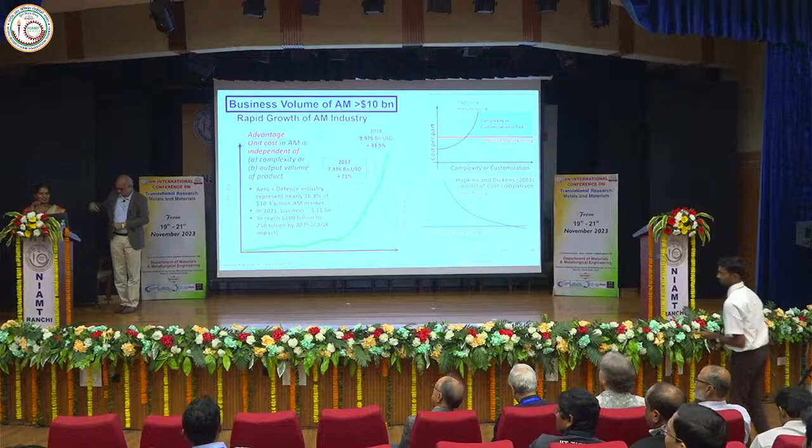Thank you. And it was a truly applied part of metallurgy.

We were able to get an insight into the various characteristics of oxides. Sir shared his lab work in laser cladding, additive manufacturing, welding in the field of superalloys, stainless steels, titanium, and so on, complemented with various characterizations starting from microstructures, tribology, and many things.